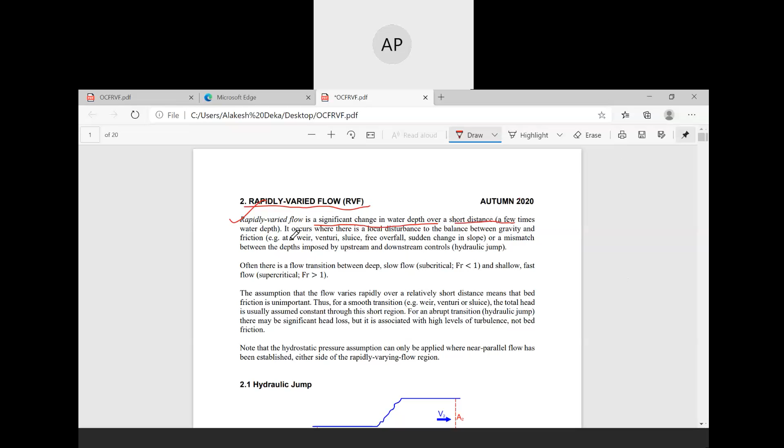It occurs when there is a local disturbance in the balance between gravity and friction. For example, the weir, venturimeter, sluice gate, free overfall, sudden change in slope, or a mismatch.

When the flow changes from subcritical to supercritical, then rapidly varied flow occurs. The assumption is that the flow varies rapidly over a relatively short distance.

Relatively short distance means that bed friction is unimportant. Thus, for a smooth transition, the total head is usually assumed constant through the short region. For an abrupt transition, there may be significant head loss, but it is associated with high levels of turbulence, not bed friction.

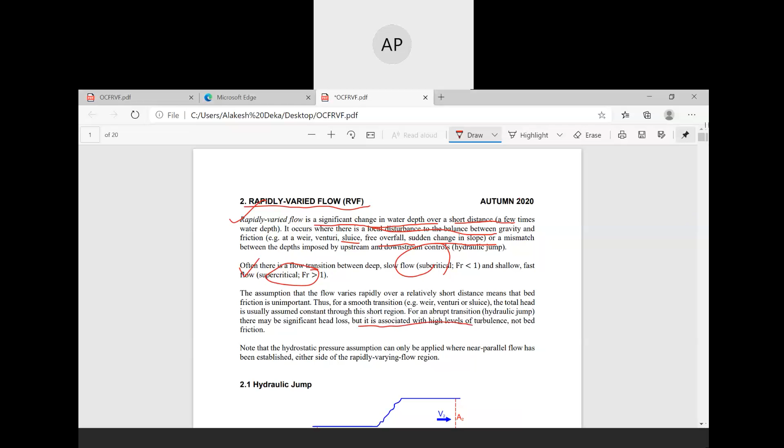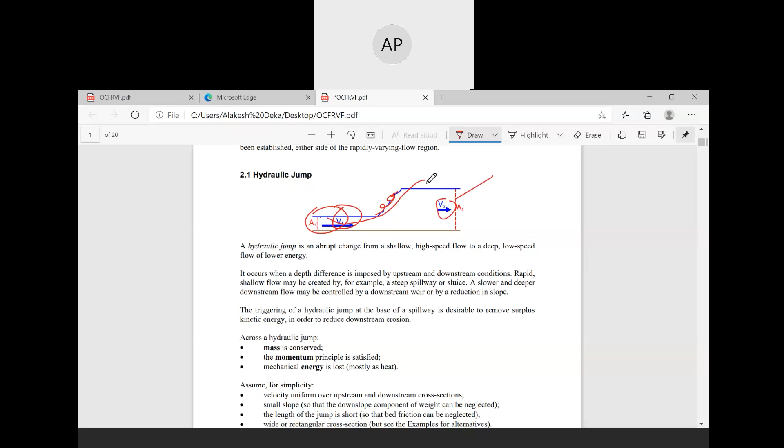So generally RVF occurs and that is called a hydraulic jump. Suppose V1 is the velocity at section A1 and V2 is the velocity at section A2. Then if flow depth changes from a lower gradient to a higher gradient, if there is an abrupt rise in water, then this type of flow is called a hydraulic jump. This is the hydraulic jump.

A hydraulic jump is an abrupt change from a shallow high speed flow to a deep low speed flow with lower energy. It occurs when a depth difference is imposed by upstream and downstream conditions.

Across the hydraulic jump, mass is conserved, momentum is satisfied, and mechanical energy is lost.

Assuming that velocity is uniform over the upstream and downstream cross sections, small slope so that the downslope component of the weight may be neglected, the length of the jump is short, and it is a wide or rectangular cross section.

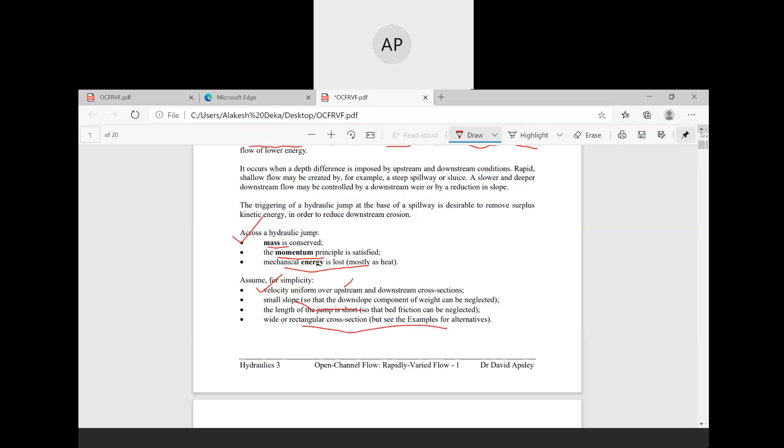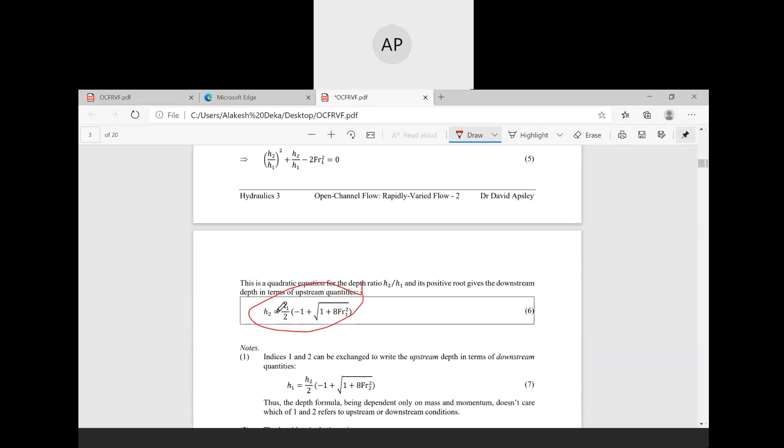There is a momentum equation for the hydraulic jump: H2 equals H1 divided by 2 into minus 1 plus root over 1 plus 8 times Froude number squared. This is a quadratic equation for the depth ratio H2 divided by H1, and its positive root gives the downstream depth in terms of upstream quantities.

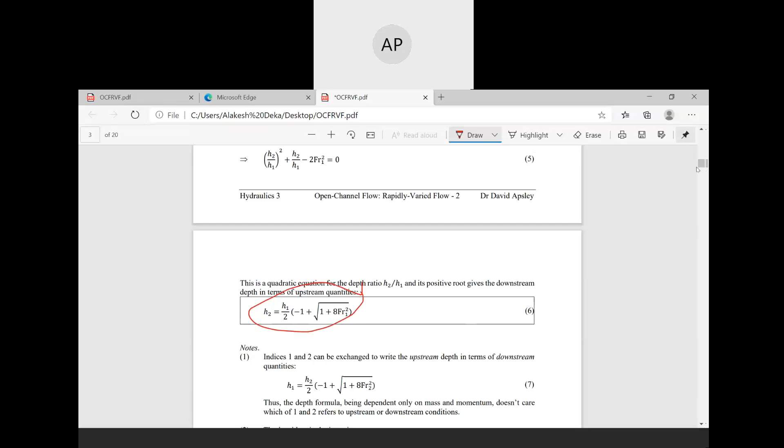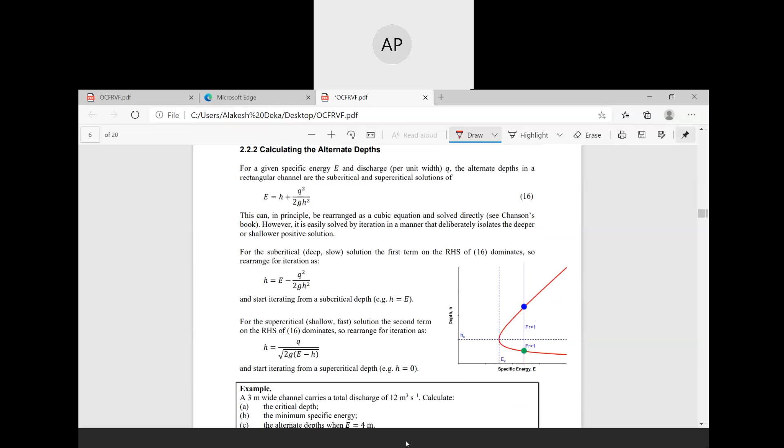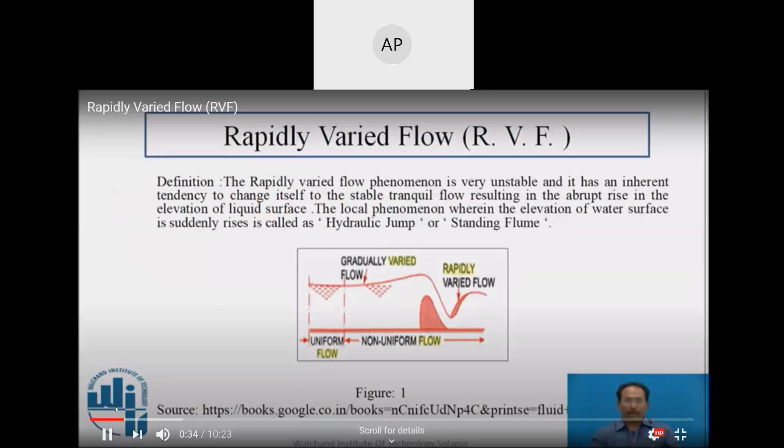First of all, after completion of this topic, you are able to understand what is the concept of rapidly varying flow. You can derive the equation for conjugate depths, or sequent depths, and also solve problems on conjugate or sequent depths.

First of all, we'll just see what is a rapidly varied flow. Last time we saw gradually varied flow, where the parameters change very gradually. Now here, it is changing abruptly, or you can say rapidly.

The rapidly varied flow phenomenon is very unstable, and it has an inherent tendency to change itself to the stable tranquil flow, resulting in an abrupt rise in the elevation of the liquid surface. This local phenomenon, where the elevation of water surface suddenly rises, is called a hydraulic jump or a standing wave.

Let us see this figure. The flow is coming like this. Here it is a barrier, and it comes abruptly down, and it flashes again coming up. See here, this water surface which is coming down, then rises up. The rapidly varied flow we can observe over here.

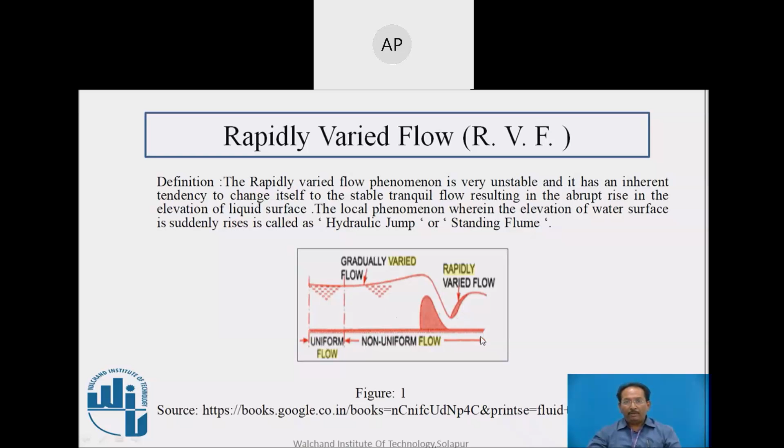Now, as an example of rapidly varied flow, we'll see what a hydraulic jump is. A supercritical flow, where the Froude's number is greater than 1, changes suddenly to subcritical flow. Why do we take Froude's number?

Because Froude's number is the ratio of inertia force to gravity force. In a hydraulic jump, the Froude's number is less than 1. Due to the formation of hydraulic jump, large scale eddies are formed and turbulence occurs, resulting in appreciable loss of kinetic energy.

Bidone, a French engineer, was the first to investigate the phenomenon of hydraulic jump experimentally in the year 1818. This is the same figure where you can observe a sudden rise here, between section 1 and section 2.

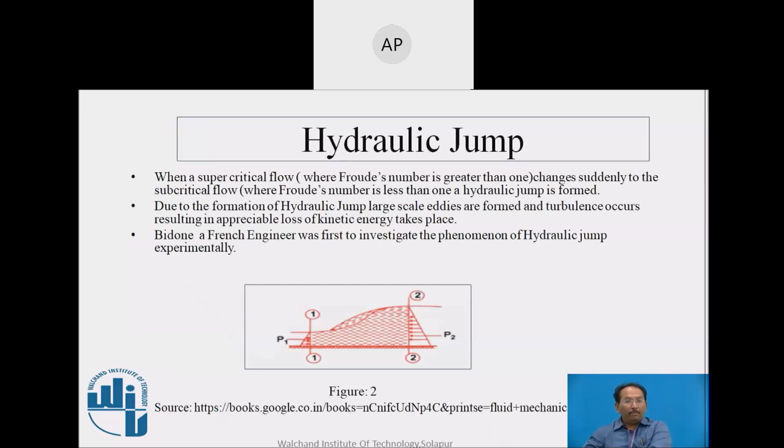Particularly here, instead of the energy equation, we are going to adopt a momentum equation. Keep this in mind. Now, define a hydraulic jump.

The answer is: when a supercritical flow changes to subcritical flow, a considerable amount of energy loss takes place. This phenomenon is termed a hydraulic jump.

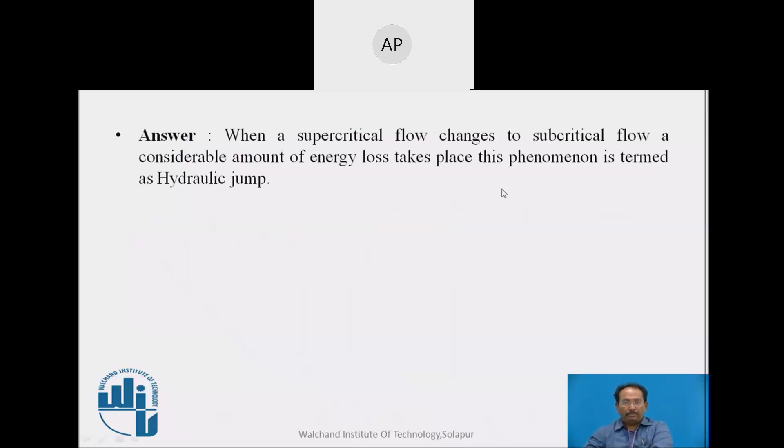As appreciable energy loss occurs in a very short length of the channel, it is advisable to apply a momentum equation instead of an energy equation, along with the continuity equation, for the analysis of hydraulic jump. As per Newton's second law of motion, the algebraic sum of all external forces in any direction is equal to the change in momentum flux in the same direction.

Applying the equation in the direction of flow to the control volume, this section between 1 and 2 is called the control volume. We get summation of Fx, that is summation of all forces, is equal to mass of the flow into change in velocity.

So it is rho, mass density, into discharge, into velocity, that is final minus initial velocity. From the figure, rho, Q, V1, V2 are the density, discharge, initial velocity and final velocity respectively.

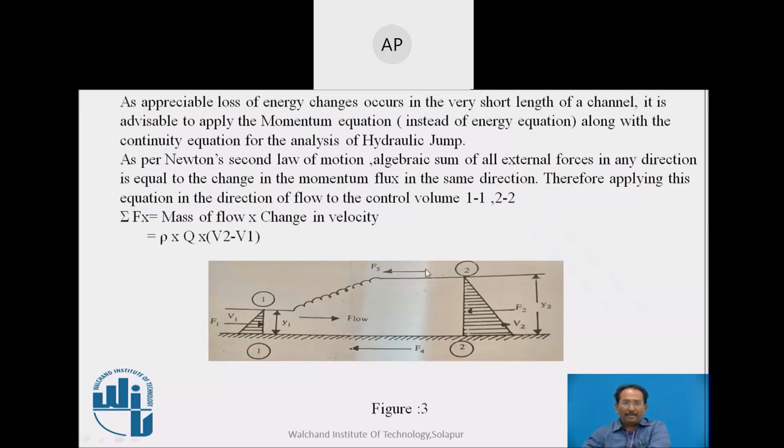Now the summation of Fx is F1 minus F2 plus W sin theta minus F4 minus F5. F1 is in the direction of flow, F2 in the opposite position, F4 and F5 are the bottom resistance and the air resistance. W sin theta is with respect to this flow.

Where F1 and F2 are the pressure forces at section 1 and 2, from the figure. W sin theta is the component of body force in the direction of motion, and F4 and F5 are the channel bottom resistance and air resistance.

Generally F4 and F5 are very small and are neglected, and since the channel bottom is practically horizontal, the term W sin theta is also neglected. Solving these, we get F1 minus F2 equals rho Q2 V2 minus rho Q1 V1. We can solve it step by step.

You will get F1 plus M1 equals F2 plus M2, where M1, the mass at section 1, is rho Q1 V1, and M2 is rho Q2 V2.

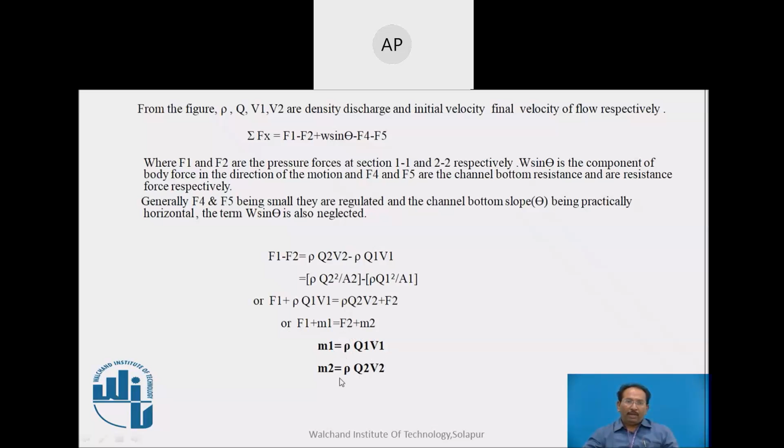Dividing the equation throughout by gamma, that is specific weight, which we also denote as W in many cases, we get this equation: F1 plus M1 upon gamma is equal to F2 plus M2 upon gamma.

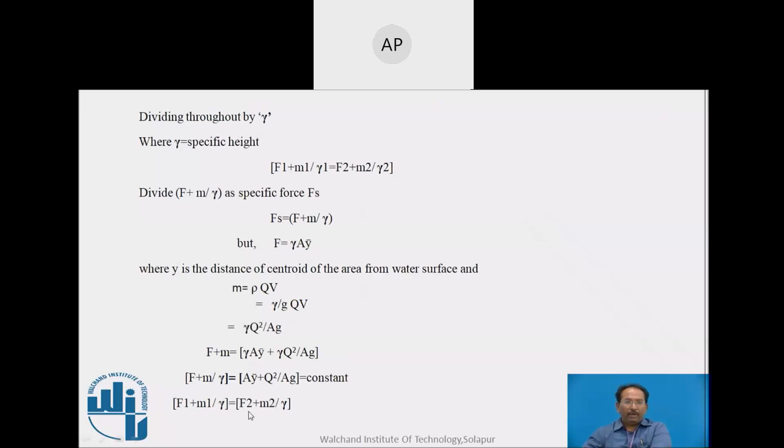That is, the specific force before the hydraulic jump is equal to the specific force after the hydraulic jump, known as the momentum equation for an open channel flow. This particular equation is very basic and important for deriving the equation for the hydraulic jump.

Fs, the specific force, depends on the depth of flow, cross section of the channel, and discharge passing through the channel. The above equation can also be written as A1 Y1 bar plus Q square upon G A1 is equal to A2 Y2 bar plus Q square upon G A2. This is a very important equation.

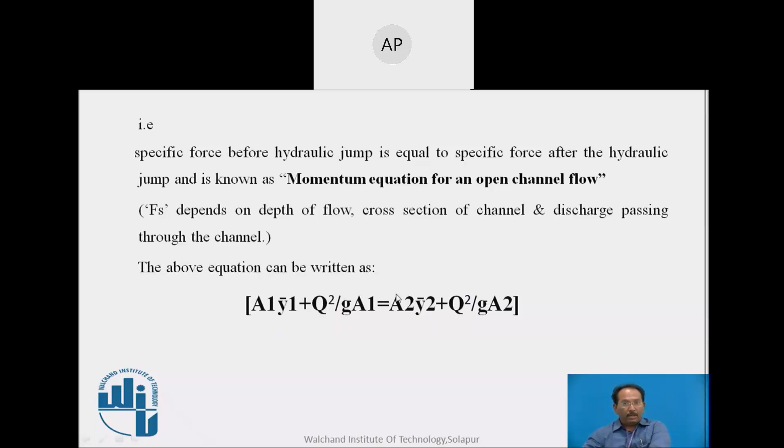This equation is called the momentum equation for an open channel flow. Now we'll see what a hydraulic jump is in a rectangular channel, and what the equation for this is. For a frictionless rectangular horizontal channel, the momentum equation is the same.

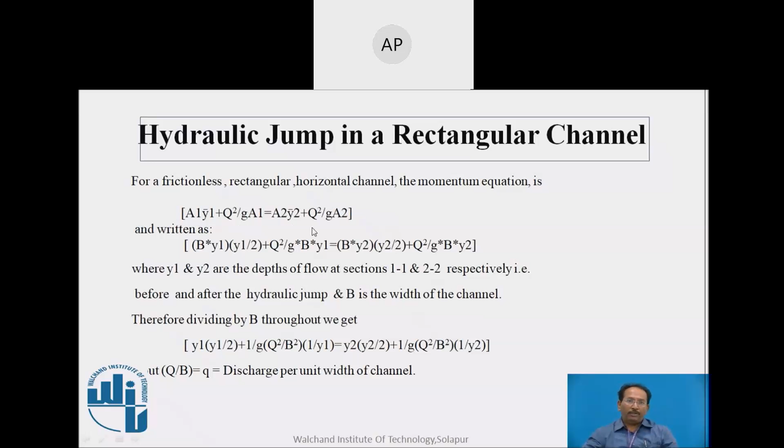A1 Y1 bar plus Q square upon G A1 equals A2 Y2 bar plus Q square upon G A2. This we can write with B as the width and Y as the depth, simplifying to B into Y1 for area 1, with the rest as is. A2 is B into Y2. We put these values in.